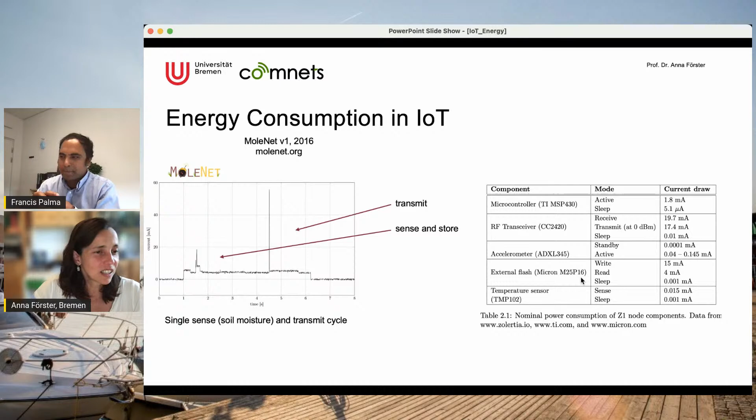This is crazy. You can try to check the recommendations of people on various websites, because those components are bought typically by nerds like us, and then you can get a pretty good recommendation of what to use or not. But they're changing so fast.

Okay, so let's go to duty cycling again. I didn't call it duty cycle before, but this is actually the scientific term for how we call sleeping. When we sleep, it's important that we don't sleep randomly. This is also a possibility, of course, to randomly sleep and to sleep as much as possible, but then you have to make sure that your communication can cope with that. I'm sure that Marco will be talking much more about communication and how to synchronize those.

The duty cycle is defined very easily. It is simply the time which you are active over the complete period. For example, here in this example, let's say we have 0.1 second you were active, so sensing, storing, sending, processing, and so on. And then you went to sleep for 0.9 seconds.

So if you calculate this duty cycle according to this formula, you have 0.1 divided by 1, which will be exactly 10%. So 10% of the time you are on and doing something. But please take care that it doesn't tell you how often you actually go to sleep.

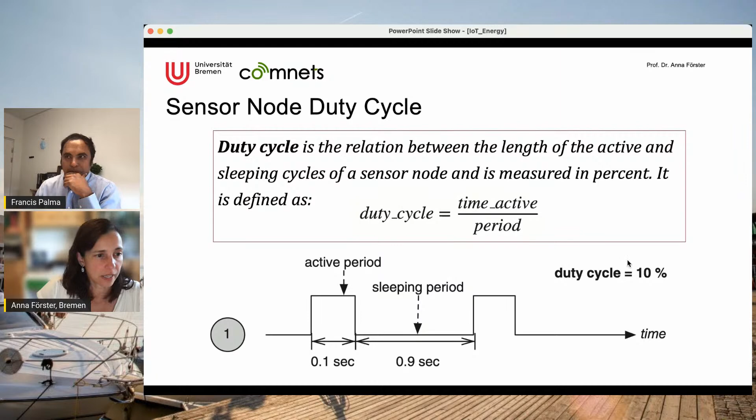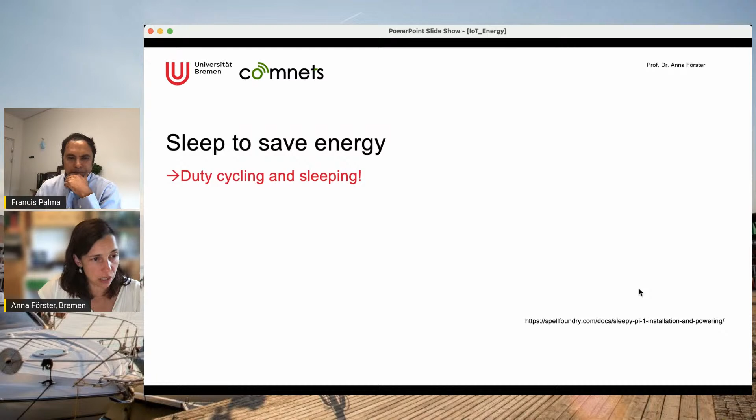So how to save energy? One possibility, and the best, is to sleep. You can do duty cycling and sleeping. I have one good news and one bad news for you. The good news is that for microcontrollers, this is all included. You get it for free. You just say sleep, and then you know that you're sleeping, and you can put also a wake-up function, and it will wake up after some time. This is available for your FiPys, LoPys, Arduinos, and so on and so forth.

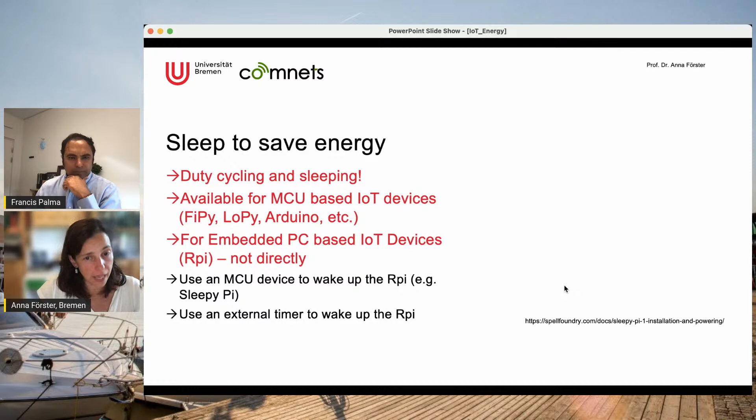However, for embedded PCs, so we're getting a little bit up the architecture now, and maybe starting thinking about gateways, this is not readily available. For example, if you get a Raspberry Pi, it is not there. You can switch it off, but it cannot wake up alone anymore. So you have two options. Either you can use a microcontroller connected to your Raspberry Pi and use the microcontroller to wake up your Raspberry Pi, and one example is here on the right. This is called Sleepy Pi.

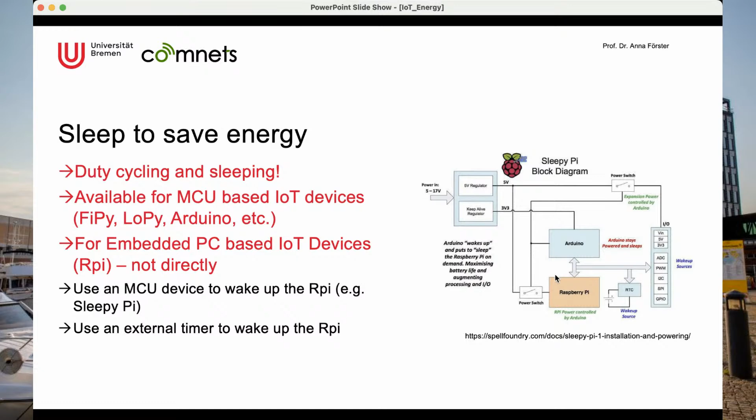Sleepy Pi is just a ready-to-go electric circuit which connects the Raspberry Pi with the Arduino. Here's the Arduino, here's the Raspberry Pi, with a real-time clock, called RTC, so the Arduino can now wake up the Raspberry Pi. This diagram is available free online at this link, and everybody can use it. The other possibility is to use something simpler than an Arduino or a microcontroller, for example only an RTC, an external timer.

The important thing is that you need an electric signal which wakes up your Raspberry Pi. Otherwise, it doesn't work. It cannot wake up alone. So any kind of electrical component which decides to wake you up is then able to do that. There are also, for example, so-called wake-up radios, a very simple radio at very low frequencies, very energy efficient, which waits for a signal that just says wake up. There is no data on this signal, but the wake-up radio can now wake up your Raspberry Pi. This is another possibility.

So there was a question also about waking up. Based on your information, it's possible for LoPy and FiPy devices, but not for Raspberry Pi devices. The question was, can we use some kind of rule for waking up based on sensor values, like using thresholds and so on? Not sure that I fully understand the question. I'm trying to think about an example. Okay, let's try to answer it this way.

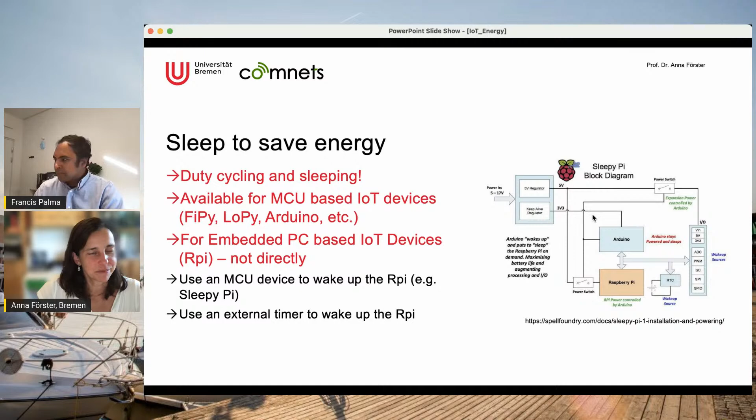So another important, let's say, skill when you are deploying real applications is to learn how to do a little bit of energy modeling. I know that it's becoming now a little bit math here, but sometimes math is actually very useful, and it's simple. I can promise you that one. So what is energy modeling of IoT devices?

Typically, based on those measurements or on those specifications, which you have seen in the first slides, you pretty much can do your own energy model by saying, okay, the total power of the device is a sum, very simple sum, between the power of all sensors and actuators, the standby power, the power for the microcontroller, including data processing, and the power for transmitting, let's say, to the gateway.

Okay, so in other words, you put all of your components which you have on your platform, and you don't forget anything. You don't forget the microcontroller, for example. You put them together, and you say, well, at any point of time, I actually have a sum of all of them. That's good. And here we have a small example, which is coming from reference one, which is on the last slide. You can check it out later.

People have done the exercise to say, well, I'm sensing, I'm transmitting, I have some wake up phase, and I have a standby phase. So you kind of dissect your program into different phases. Exactly as you have seen it there in the first slide with MoleNet, I had a sleeping state. I had a phase where I'm sensing and storing, and I had a phase where I'm transmitting, then maybe doing some data processing, and then again sleeping.

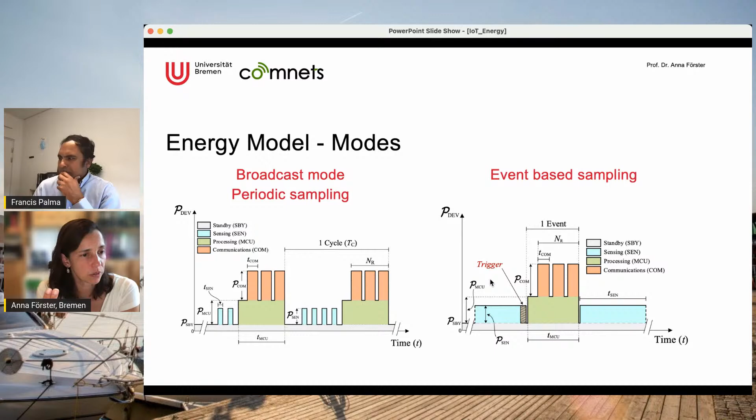Why do we do all of this stuff? Maybe I have to explain that before going ahead. The reason is that you would like to predict how long will your application survive. You have some batteries, you have your platform, you have your implementation, your application, and you would like to predict, am I going to survive with that for a week or for a year? This is important, okay? So that's why we're doing all of this.

So when you compare now periodic against event sampling, as I already said, in periodic, the pro is really that it's very simple. You march through time and there is no difference to the application, what is happening, what kind of data you have, and so on. The disadvantages of using periodic sampling in general is that you might actually miss some important measurement, or you might also send duplicate data because, for example, nothing has changed since the last event.

So, for example, if I'm sensing, let's say, an agricultural scenario every 15 minutes, I actually might miss some small rain or something else. Or I could be measuring exactly the same over and over again because it's, for example, during the night and nothing interesting is happening and the temperature is staying the same. Then I will send duplicate data because simply the data is the same as last time.

So that is a little bit triggered then by the event-based applications, when you only send data if something interesting is happening. The good thing about that is you only send really important data and you save on transmissions. And you're also a little bit better at not missing important stuff. The problem is, of course, to define actually what is interesting, so it could be that you defined it in a way that at the end you get too little data and you again miss some important events. And this requires simply a very good model, a very good understanding of your events.

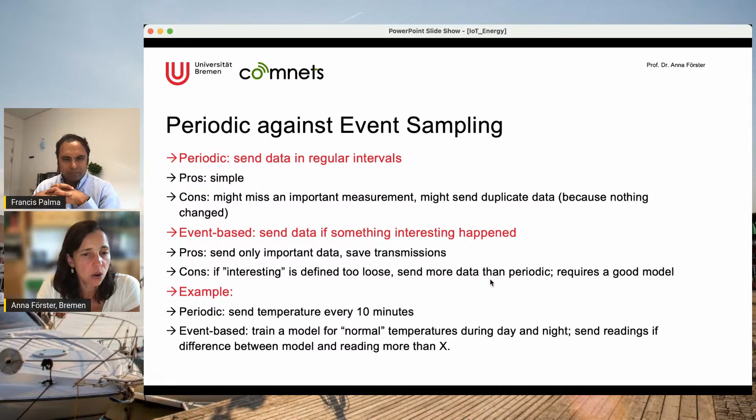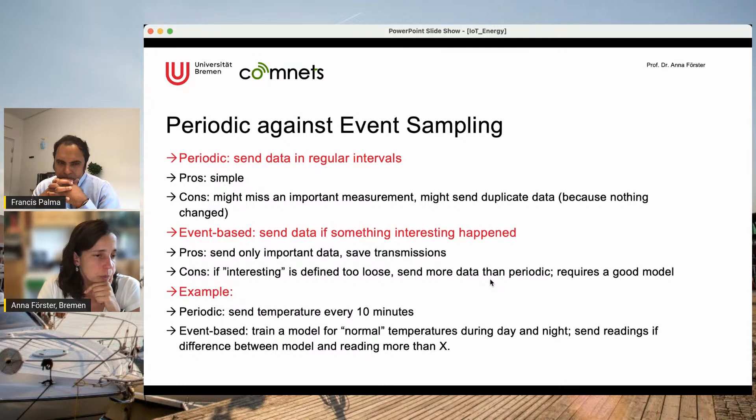Okay, I gave that example many times already. So, for example, periodic would be simply send the temperature every 10 minutes, or event-based would be train a model of what is a normal temperature during day and night, and then send the reading only if there is a difference between this expected temperature and the current reading. That would be a simple example. So, back to energy modeling. Any questions so far?

Not about the slides, but there was a question about the course requirement, like if students need to do the energy modeling for their projects. I said no if they don't want to. Okay, you managed already this. But I would say whoever does it gets some bonus points. Yeah, that's of course for the higher grades.

Yeah, exactly. So we are back into energy modeling, and we would like to discuss now the precision, because this is something which should already start ringing an alarm bell in your heads: is that simple model really good for us? And can it really be of any use?

That's correct. It's a very simple model. There exist, of course, much more complex ones, but let's not bother about them here. So I do not take, for example, any battery properties into account, right? I simply assume a battery is kind of a bucket full of energy bins, and I can take them one by one and use them for something. So this is not a very realistic one.

Of course, the results of such a model will be very imprecise in absolute numbers. So I will predict at the end something like a lifetime of my device system, 17.5 days, right? Because I'm juggling with numbers. And at the end, I will get something which looks very precise. But it's not. And the absolute numbers are not important. And you should never really take them very seriously.

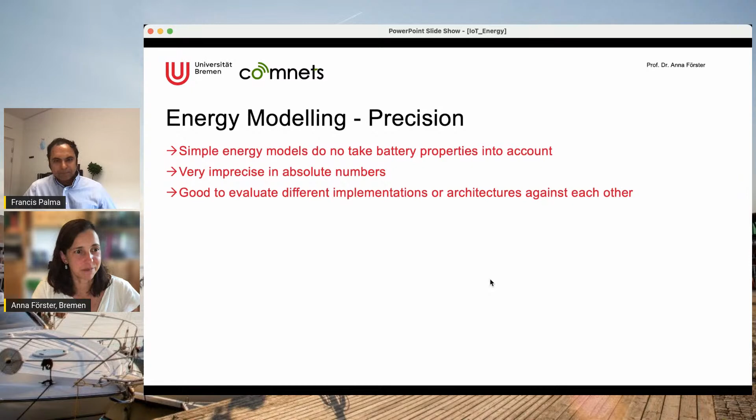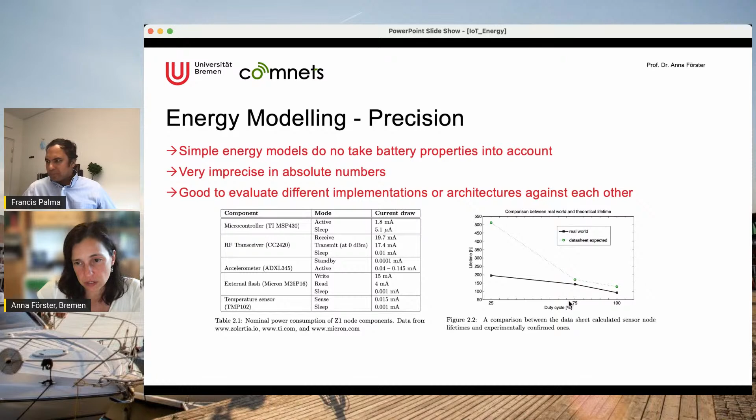Then you have a duty cycle of 75% and a duty cycle of 100%. And so this dotted green line here is what we calculated with an energy model and the data sheet specifications. So at 25% duty cycle, we calculated that the lifetime of our particular application will be above 500 hours. Then for 75%, we calculated it to be somewhere between 150 and 200. And then for 100% duty cycle, so on the whole time, no sleeping at all, we calculated it to be something like 140 hours.

And then we ran some real experiments and we left the sensor nodes to really die. And then we measured this time. And what we discovered, of course, is a big discrepancy between the specification and our simple energy model and the real value.

However, what you can also see here is that the tendency is the same. So the energy model is able to take into account that with lower duty cycles and more sleeping, we will be saving more energy than if we don't sleep at all, and in between is the 75%. So, in other words, again, I would like to stress: do not trust the absolute numbers, but always use them in comparison to each other.

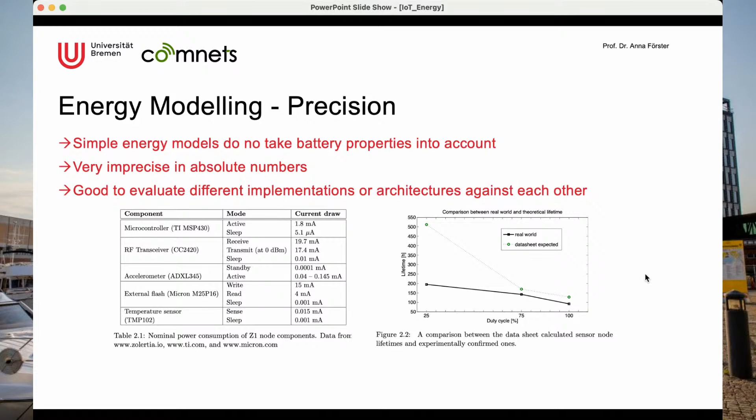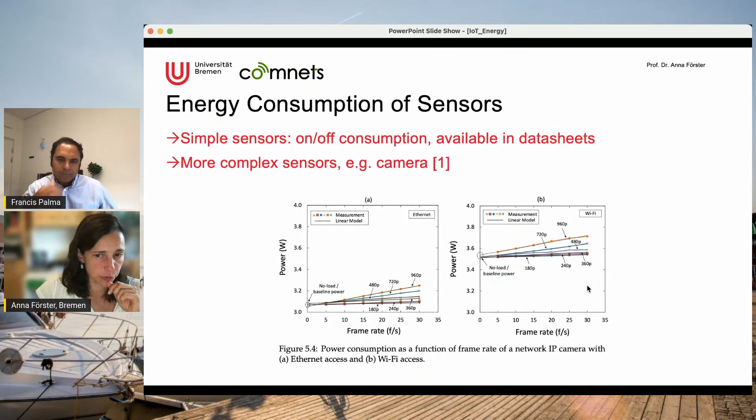So, a little bit about the energy consumption of sensors. As we said also yesterday and today many times, simple sensors have some sort of an on-off consumption, which is available in data sheets. You just check it, you know it. It's a little bit more complex if you start getting into a camera. And here I have a very nice example for you just to understand what's going on here. This is again coming from this reference one, which you can check later.

Here, the authors have measured the power consumed by a camera depending on the frame rate, which they have set as a parameter, of course, of the camera. And then they measured it in two different situations. One was to connect the camera to an Ethernet. The other one is to power it with Wi-Fi. So Wi-Fi will obviously use more power. It has a bigger energy consumption than using Ethernet.

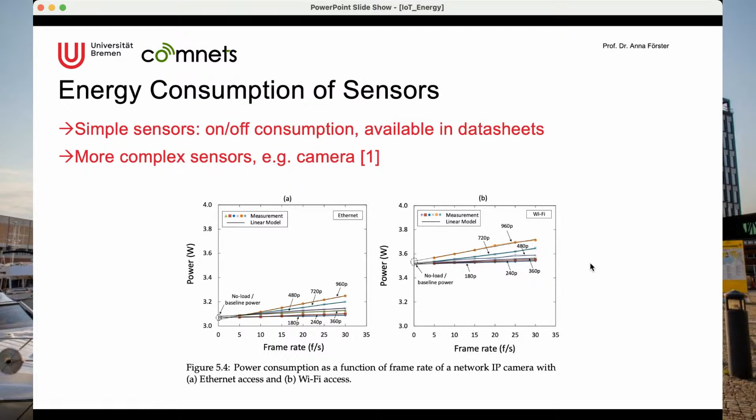And so what we have here is that depending on the frame rate, of course, the power starts growing because it's more precise, let's say, right? Like the quality is increasing with the frame rate. And so the power does so also. And if you compare it now to Wi-Fi, you see that, of course, Wi-Fi is much more power consuming than with Ethernet. And so the whole story moves here up. Okay. So this is just to understand also a little bit the energy consumption of sensors.

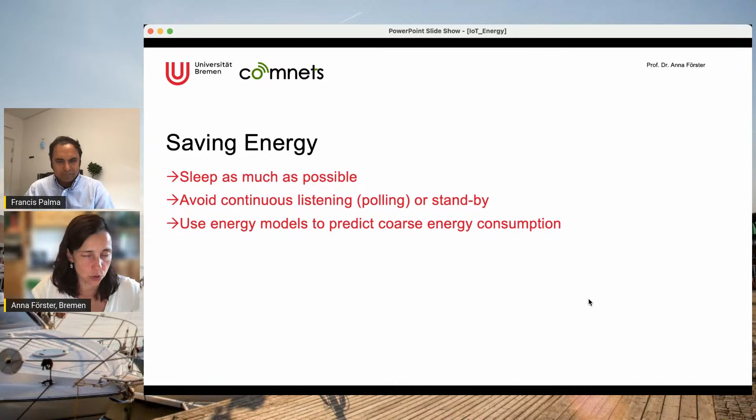You can use an energy model to predict coarse energy consumption in order to understand better your system before you actually deploy it. And you should really plan very carefully your communication pattern. Like, is it event-based? Is it polling? Is it periodic? And you should always switch off all non-used services and hardware components. For example, the external flash or some sensors which are currently not needed. You should always shut them down.